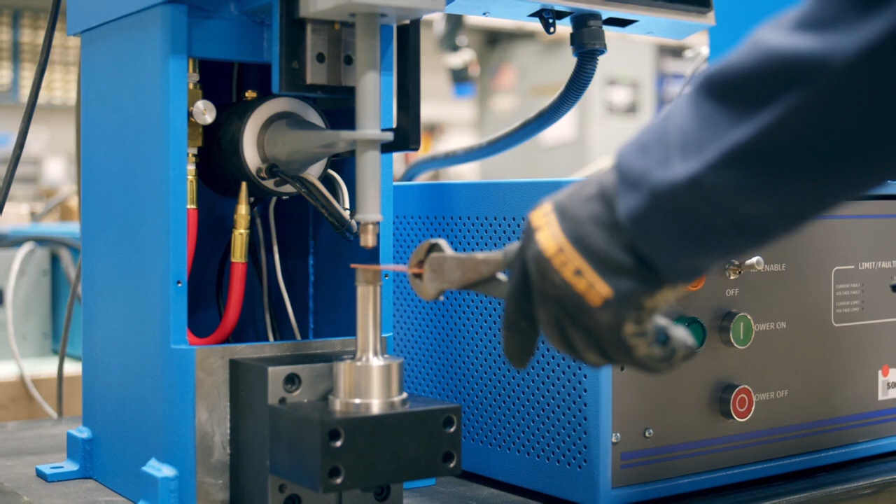Meet the SonoWeld high-performance ultrasonic metal welding system. It's engineered to produce fast, strong, and repeatable spot welds and wire-to-terminal welds. Whether you're working with copper, aluminum, or tinned metals, this system ensures clean, solid-state bonds without heat, current, or consumables.

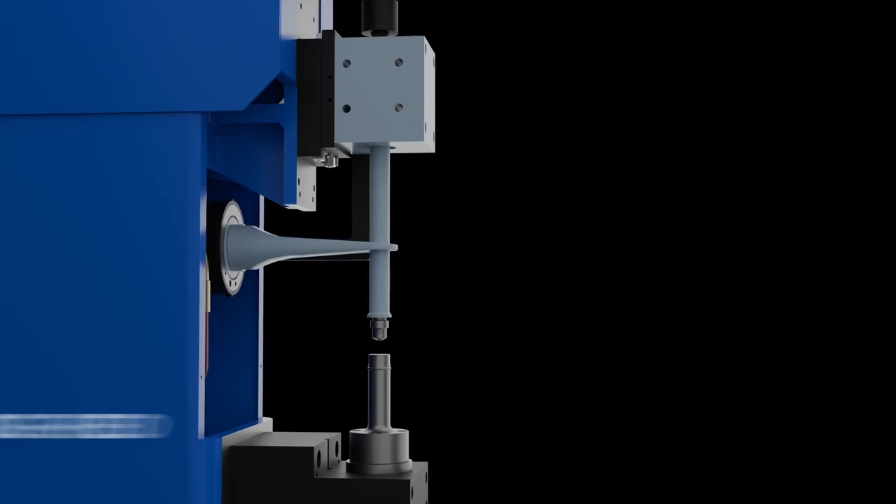With advanced automation features and our patented wedge reed system, the SonoWeld system delivers unmatched performance. It stores and recalls more than 250 weld protocols for repeatable accuracy. The wedge reed coupling system combines high vibratory force with low amplitude to produce strong, precise welds.

Taper lock tips perform up to 50,000 welds before needing replacement. The system easily integrates into automated assembly lines and works in multiple orientations.

3,500-watt models are available to weld a wide range of non-ferrous metal types and thicknesses, similar to dissimilar, thin to thin, and thin to thick. They can even join oxidized or tinned metals in just one pulse and without pre-cleaning. No other ultrasonic metal welders can do that.

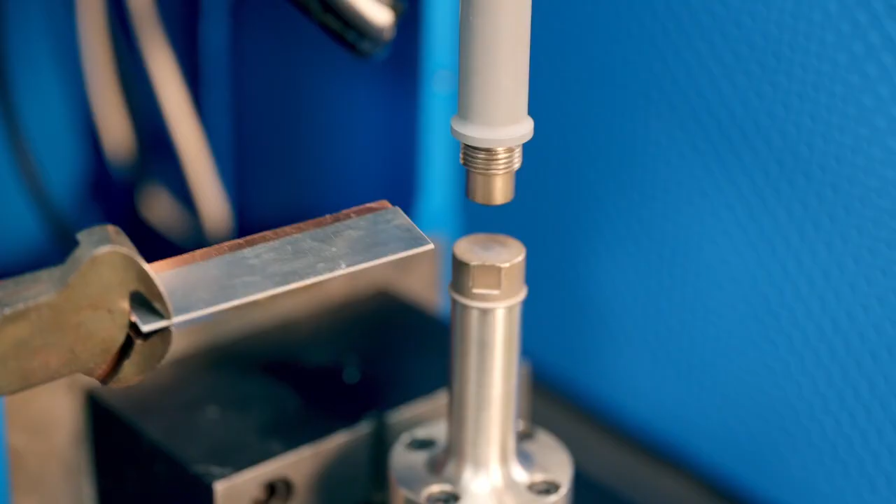SonoWeld welders direct high-frequency ultrasonic energy through a welding tip to the surface between the metals. This energy disperses surface oxides and contaminants, creating a true metallurgical bond without melting the material. The result is stronger, cleaner, and more conductive welds with zero metallurgical defects.

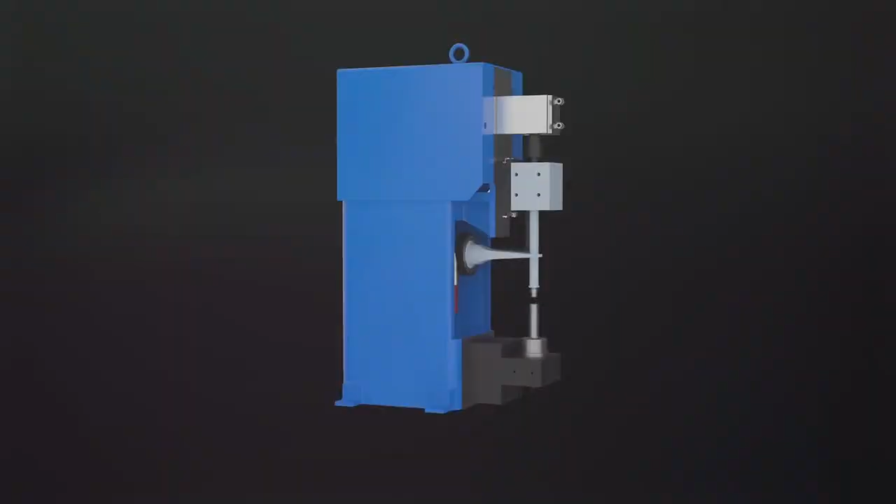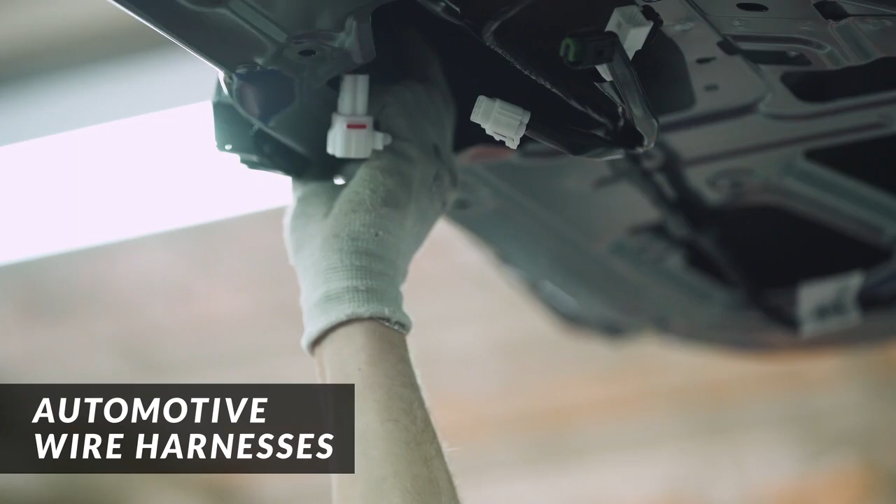The SonoWeld system is trusted in a variety of critical applications. It welds lithium-ion and NiMH battery foils, tabs, and terminals, ensures low-resistance, high-integrity welds for power distribution, bonds stranded copper wire to brass or copper terminals, and provides ultra-reliable welds

in mission-critical applications. Upgrade to SonoWeld performance and transform your metal joining process. Get stronger bonds and faster production with zero consumables.